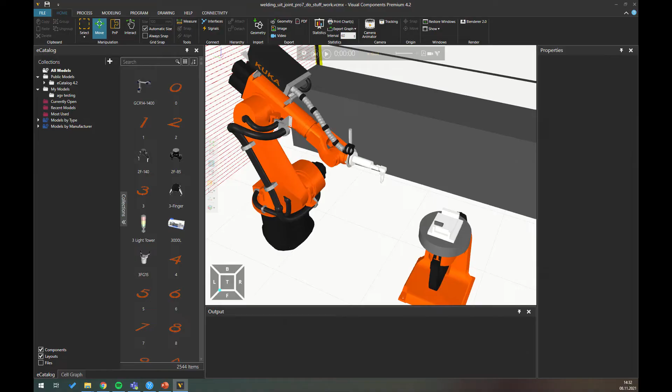First, you open Visual Components and load the file of your digital twin of your welding system. Afterwards, you press the program function, which allows us to program our robot.

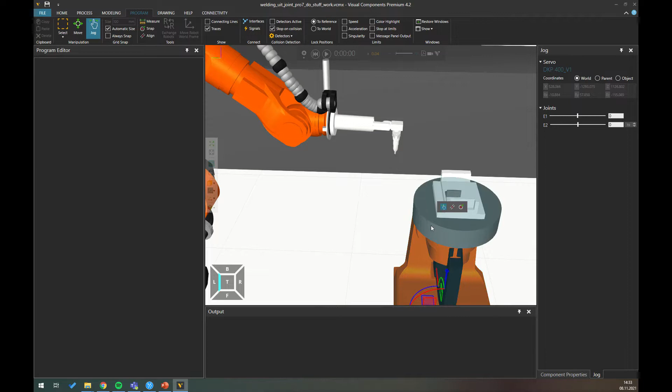If you press on the robot, on the right-hand side you will see A1 to A6, which are the joints of the robot that can be moved, as well as E1 and E2, which relate to the rotary table and can also be jogged and moved.

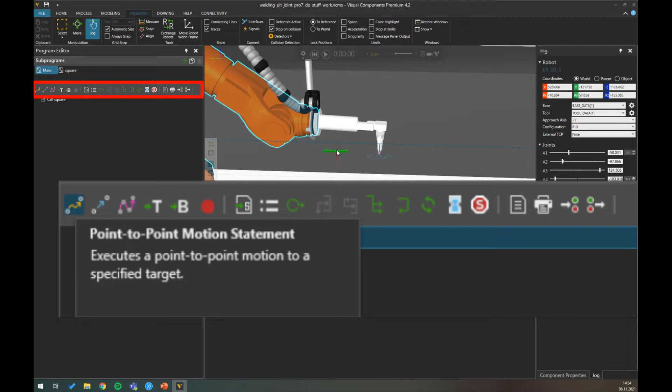To program the robot and add points, you use the buttons highlighted in the red square. There are three options for adding a movement. You can either choose a point-to-point motion statement, which moves the robot from point A to point B as fast as possible.

You also have the linear motion, which uses the inverse kinematics, or X, Y, and Z of the robot, to move to the position. The third option is the path statement.

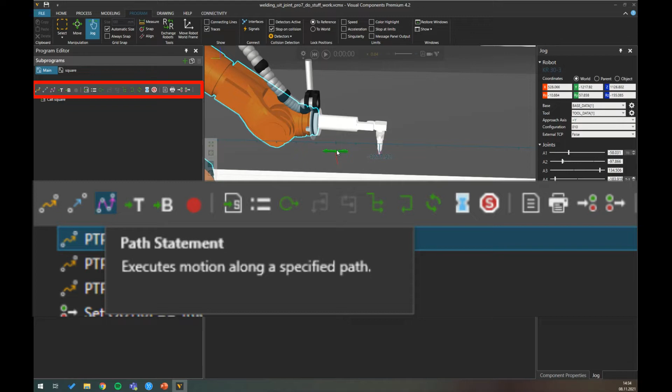This allows us to automatically generate a movement from a fixture in our model. If we import a 3D file, we can automatically generate a path around a corner. We'll come back to this a bit later.

In this example, we're going to weld together two metal plates, as you can see in the video. The idea is that the robot starts with the table straight and the robot straight, then moves down to the middle point of the two plates and welds a line.

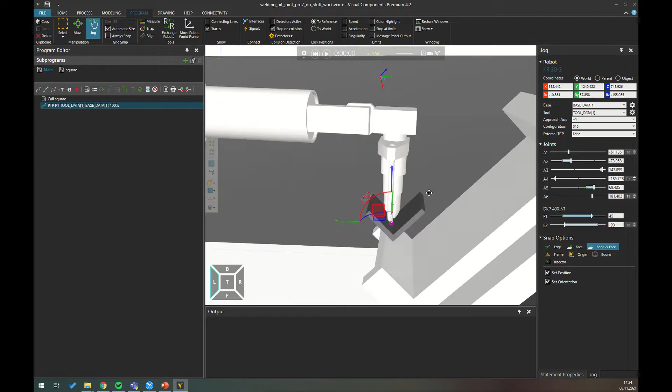The video is now showcasing when points are being added to where the robot is going to move. We just drag the robot around with the rotary table to get the positions we want, then add them as either a point-to-point movement or linear movement for this program.

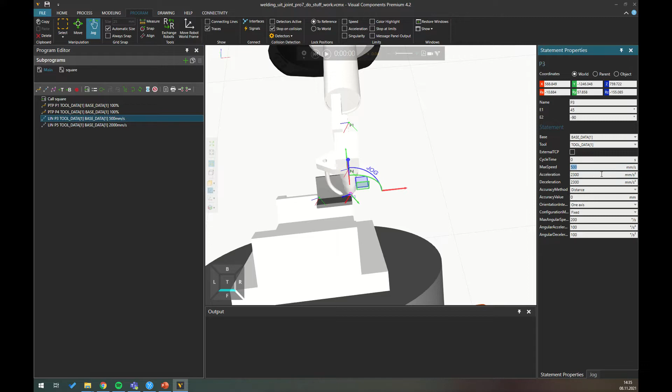The points can also be dragged up and down depending on what order you want the robot to hit before going to the next point.

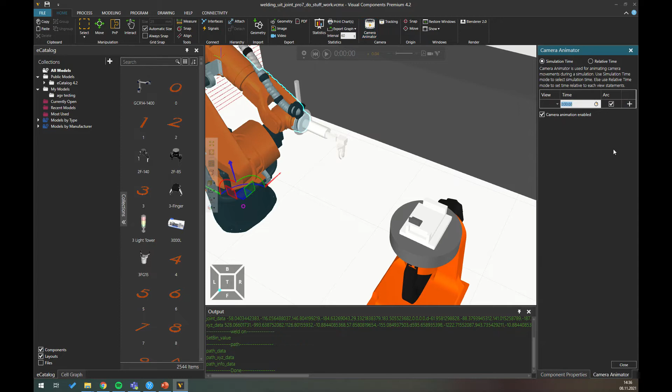Afterwards, when the programming is done, you can run a simulation and see the movement of the robot. You can also turn the camera for different angles while the simulation is running, to make sure everything is okay and that there is no collision between the rotary table and the robot arm.

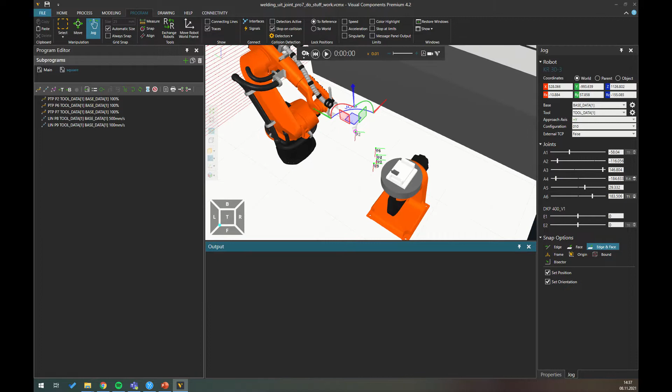In the output field, you can also see the program being printed out. These are the movements the robot will execute, and these movements can be transferred over to the physical robot.

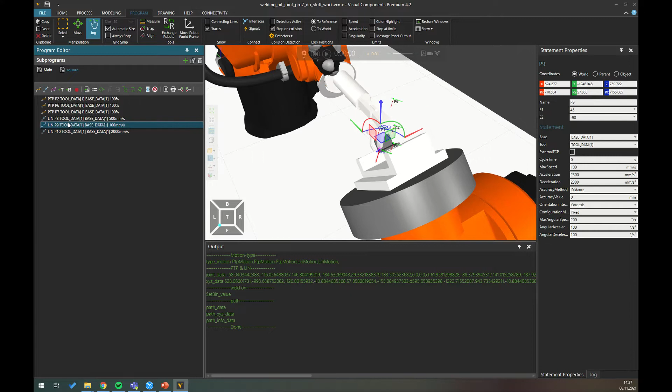It is also possible to add more points. If you see that some points are missing where you want the robot to go, you can add them afterwards and rerun the simulation to again verify that everything is okay and that the movement is still good.

In this case, the physical robot needs to be connected to the OPC UA server. Each time you run a simulation, the program you are running in Visual Components will be transferred over to the OPC UA server. You can then afterwards execute the same program you created in the simulation software on your physical robot.

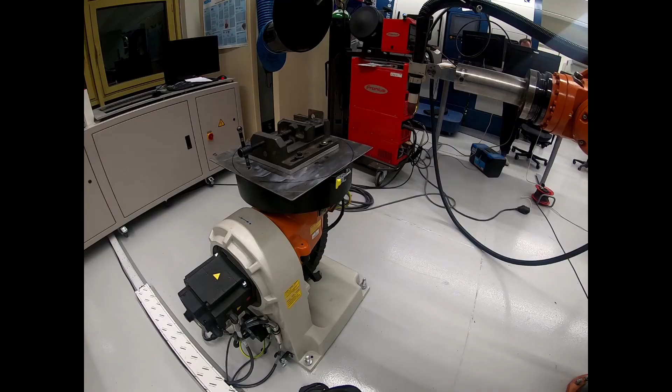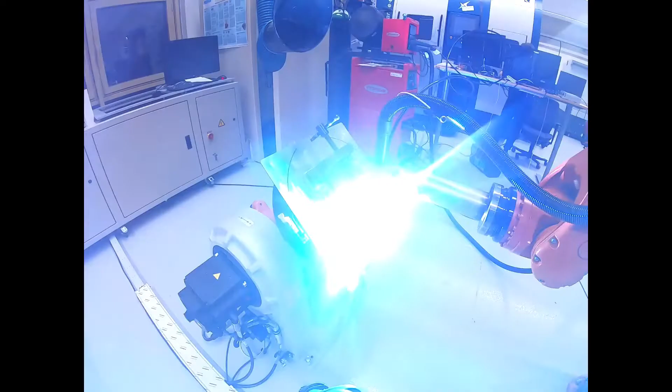In this case, we have taken the program we created in Visual Components and transferred it to the OPC UA server, and are now executing it on the physical robot. We are here welding together the two plates as we did in the simulation, but in this case on the physical robot.

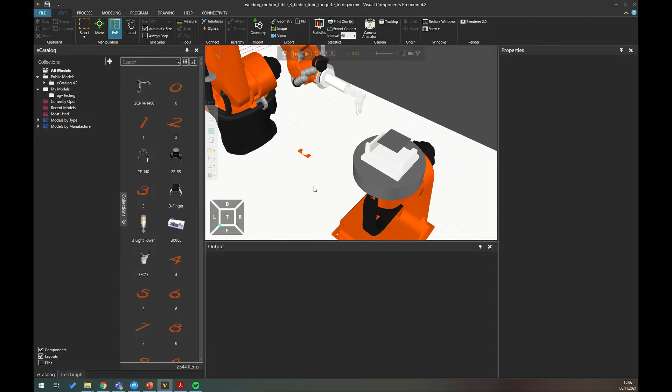For the second example, we are going to use the path function to automatically generate a robot movement based on a CAD file. The first thing we do is import the CAD file you want to use to create the path. This is done by pressing the geometry button in Visual Components.

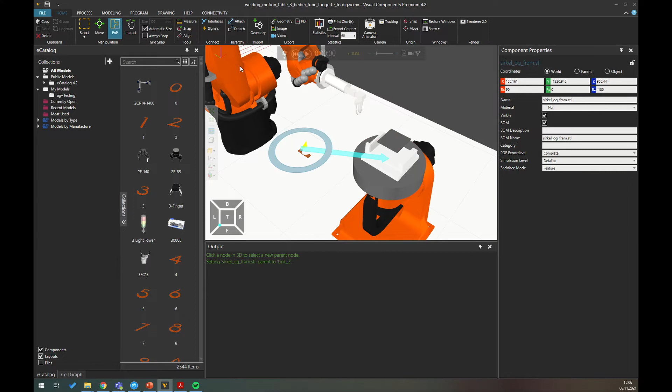Afterwards, the part has to be attached to the rotary table to make the rotary table and the CAD file one part. This is done by pressing the attach button and then pressing on the rotary table. This allows you to move the CAD file and rotary table as one unit.

Then you add the same points as you did before for the point-to-point and linear movements to move to the part.

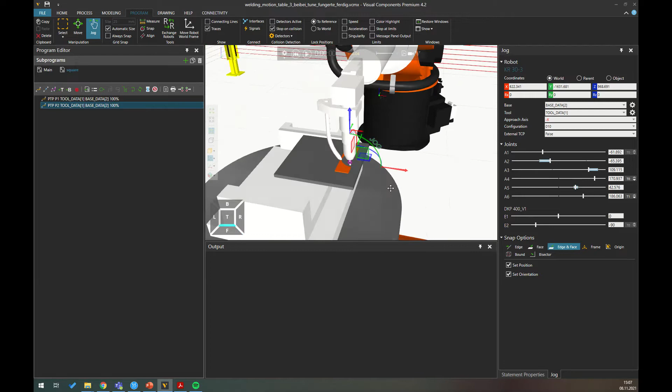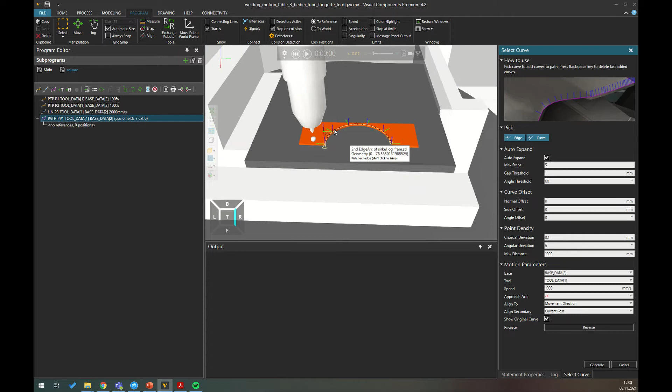Afterwards, you choose the path function in Visual Components. You then press on the curve you want the robot to move alongside. You also need to choose the right direction you want the robot arm to move in.

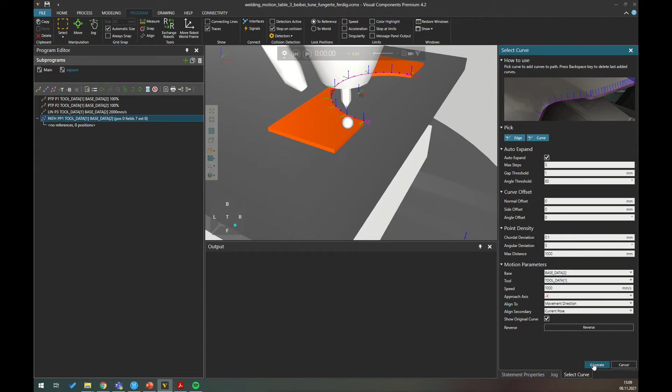You also have to choose if you want the robot to move in the same axis as the coordinate system you have chosen for the path. Since we have a TIG welding robot, we have to move in the path of the feeder. However, if we would have a MIG welding robot, then the orientation wouldn't play a role.

We can then see a path has been generated based on the curve of the part. However, we can see that half of the points are green while the rest are red. If the points are red, it means that the robot arm can't reach these points.

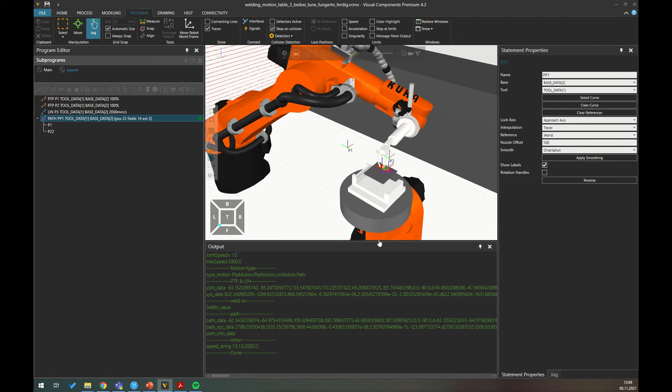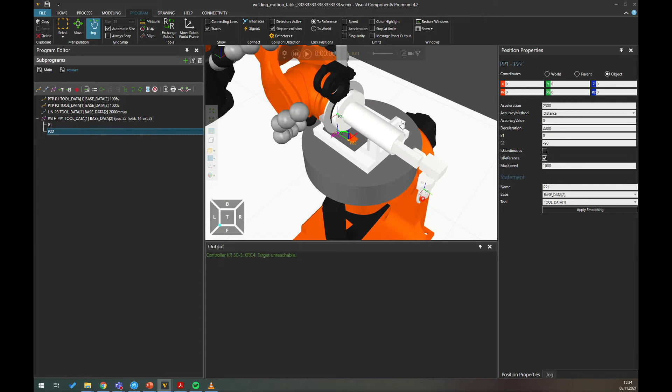To fix this, we first choose the last point where the robot arm will move for this curve. Afterwards, we rotate the table to a position where the robot arm can actually reach this position, and we then take the point of the robot arm and drag it over to the last point.

Then we right-click on the last point and press Touch Up. This will smooth out the last movement.

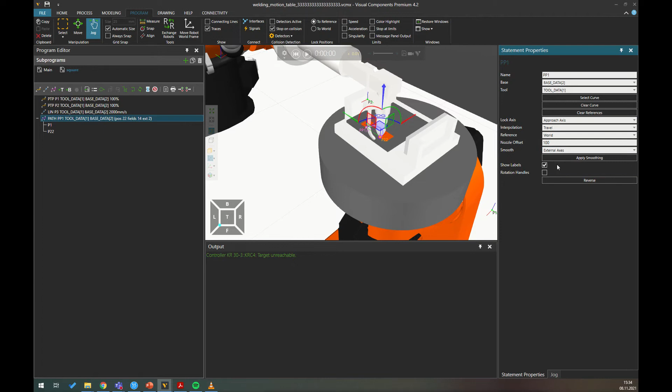We will afterwards press on the path movement, as you can see here, and then press on the smooth button and then press on external axis. So here we're going to use the external axis to smooth out the movement of the robot arm so that it can reach all the positions in the half circle.

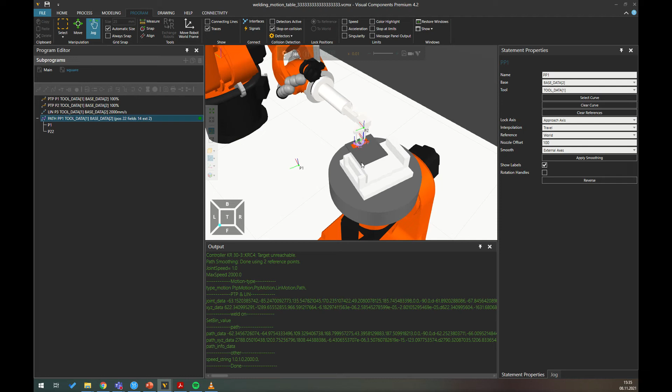In this case, the external axis are the two axes from the rotary table. And now when the simulation is running, you can see that it is rotating the table as it is moving. This allows the robot arm to have the right direction while it is moving, but also being able to reach all the points.

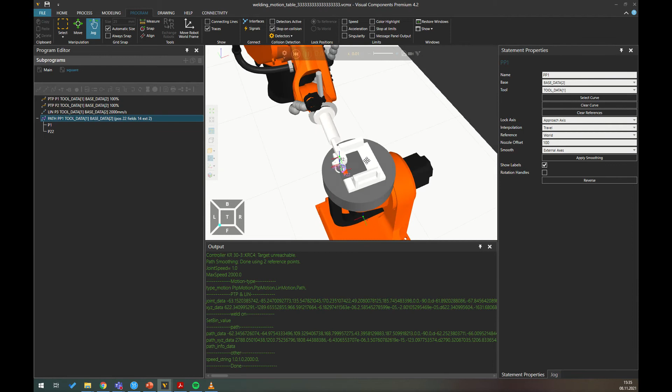As you can see in the sample, the robot stops and then moves to each point. If you want a continuous motion, you can choose all of the points and then press on the continuous button on the right hand side, which will then enable the robot and simulate it going in a continuous motion for the half circle.

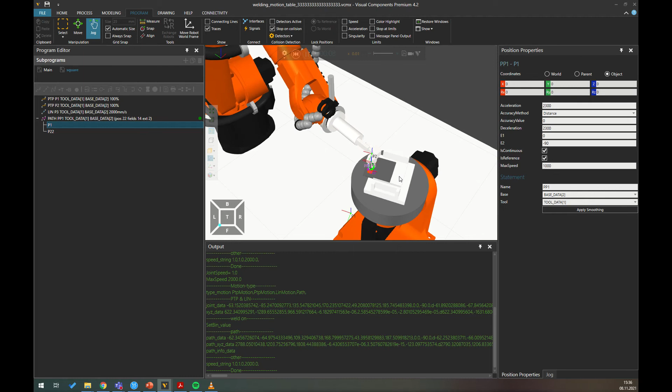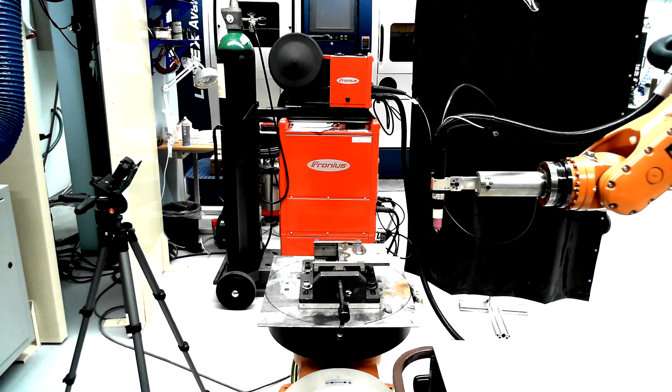After, when the simulation is done, this same program can be transferred directly over to the OPC UA server and then executed on the physical robot, as can be seen here.

In this video, we have showcased how to program in a linear movement or welding a linear line with our welding robot using Visual Components. We have also showcased how the system works. And at last, we showcased how we can automatically generate a path from a CAD file. This allows us a flexible and fast method to reprogram a robot arm for welding.